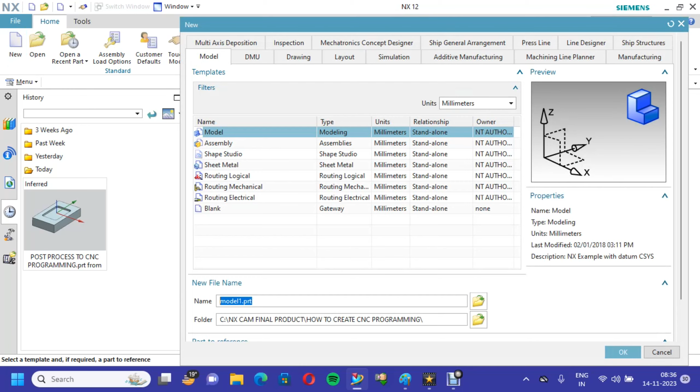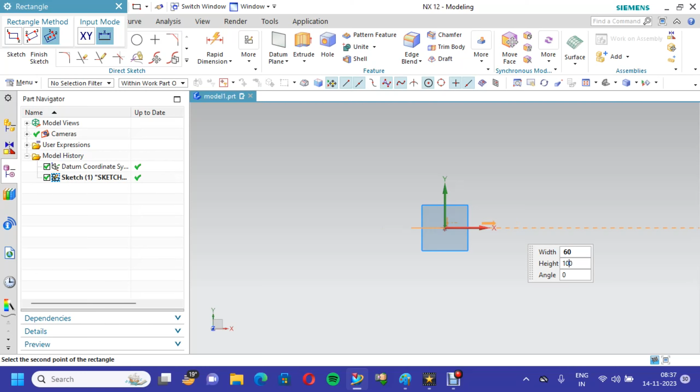Create one model or workpiece. My workpiece is having the width of 60 mm and 100 mm length. In this workpiece I am creating one rectangular pocket. The pocket width is 40 mm and the length is 60 mm.

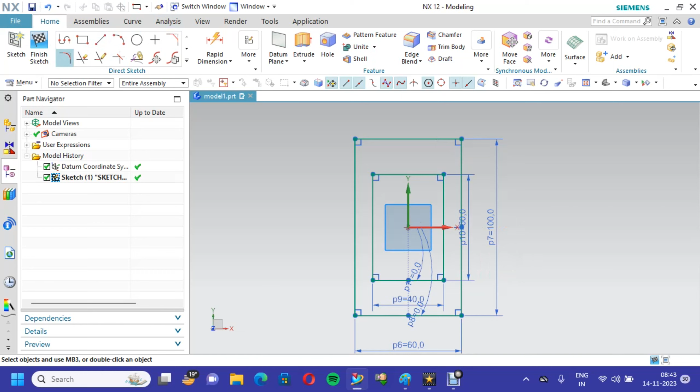I am going to make one fillet radius with the value of 5.

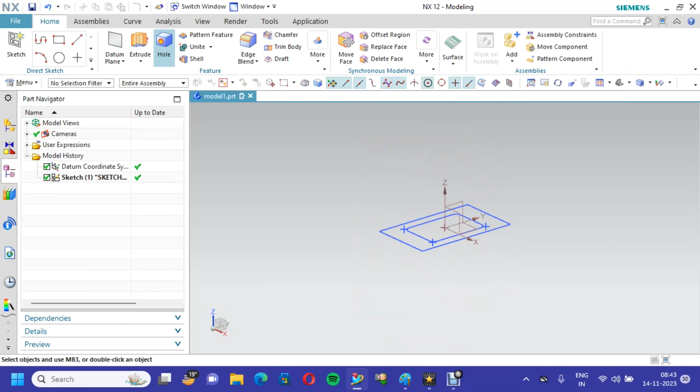Then I will extrude that workpiece. The height should be 20 mm.

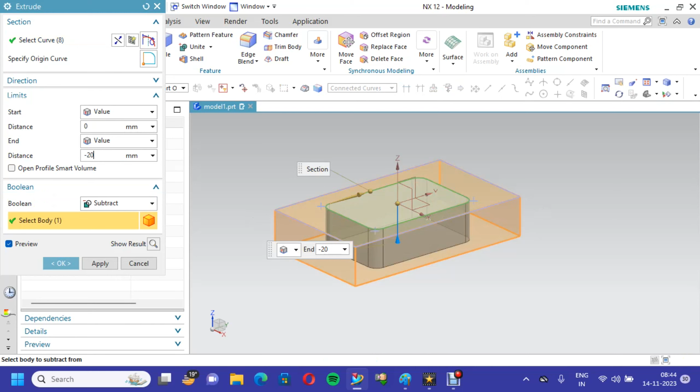Then I will cut the pocket of 5 mm depth, subtract minus 5 mm depth.

This is my workpiece. My workpiece is 100 mm length, 60 mm width, 20 mm thickness. In this workpiece I have created one pocket, with length of 60 mm and width of 40 mm, and thickness is 5 mm. Means the height of the pocket is 5 mm.

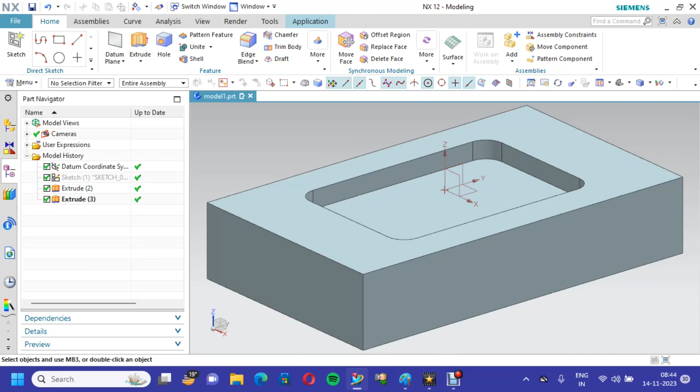So it's not necessary, so I will hide these sketch commands. We will go for manufacturing, go to application mode, take it manufacturing, CAM general, and go to mill contour.

We will go for geometry view. MCS mill appears, machine coordinate system mill. We have to edit it and specify MCS. You can specify here or here or here, but normally we will put it at center or left side. I am going to put this one.

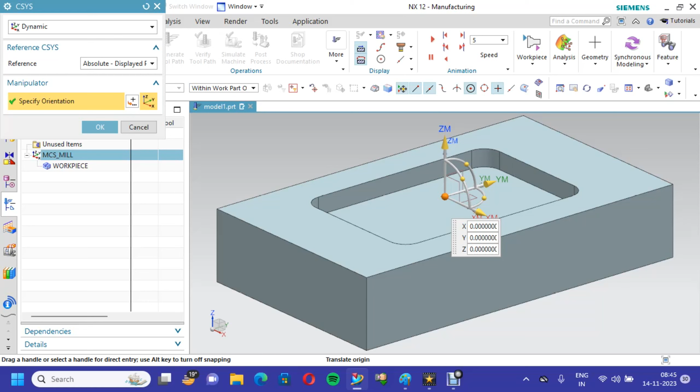Then clearance options. We should give safe clearance, meaning the cutter will come 10 mm above the workpiece. It is very important. We have to say 10, 15, 20 mm plus. It's very useful to create programs in post-processing for CNC milling.

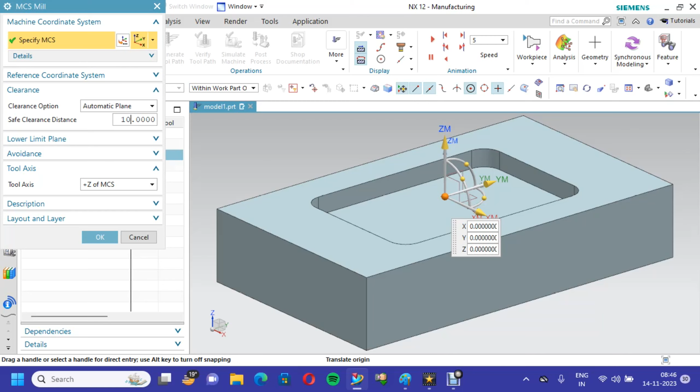If you are putting 0, it will come and touch the surface of the workpiece material. So we have to give safe clearance. I am explaining each and every step for creating CNC milling program only.

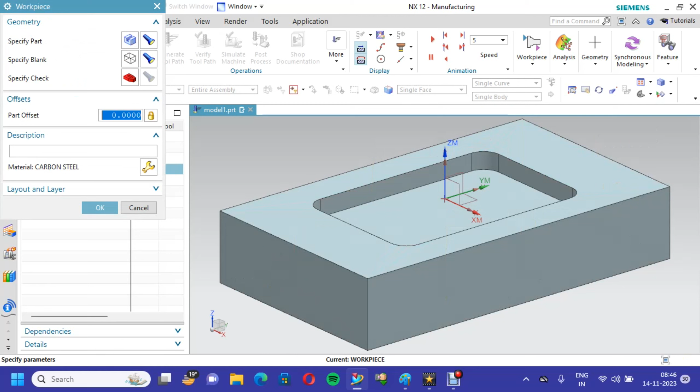Second one is workpiece. First we have to specify the part. This is my part. Then we have to specify the blank. We have to go for bounding block. I am not going for any extra material, so I am just putting this. We can verify this is my part and this is my blank.

Then we will create operations. We will take cavity mill. Here NC program we can make as program. Tool we have to select. Geometry we already selected by workpiece method, and for method also we have to go for finishing. So I will not give any allowances, directly I am going to finish. The main purpose of this video is how to create G code and M code for your control.

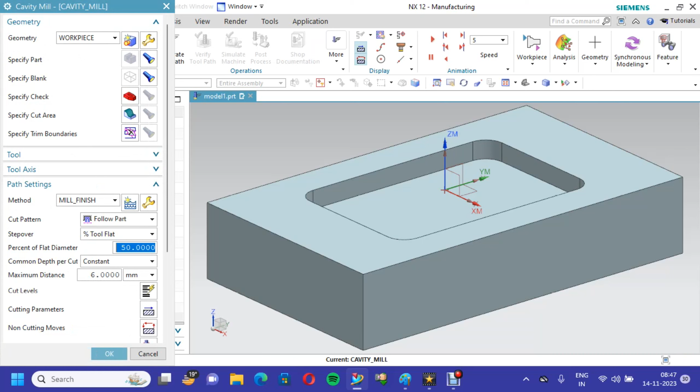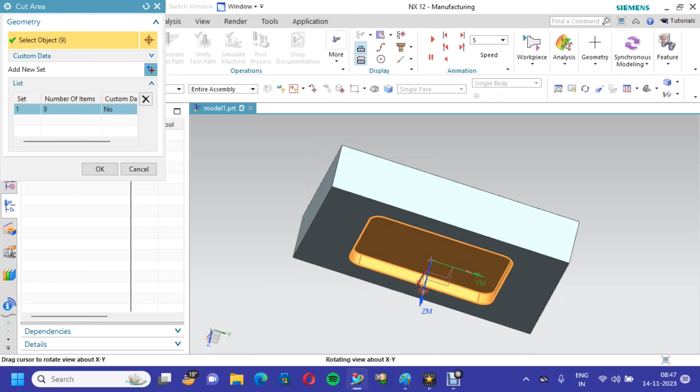We have to specify cut area. This pocket is to be cut. We have to check it. You have to click, and if it is not coming, you have to click again. Now all surfaces have been selected.

Second one, now we are going to take the tool. We have to create the tool. Take end mill. 10 mm end mill I am taking.

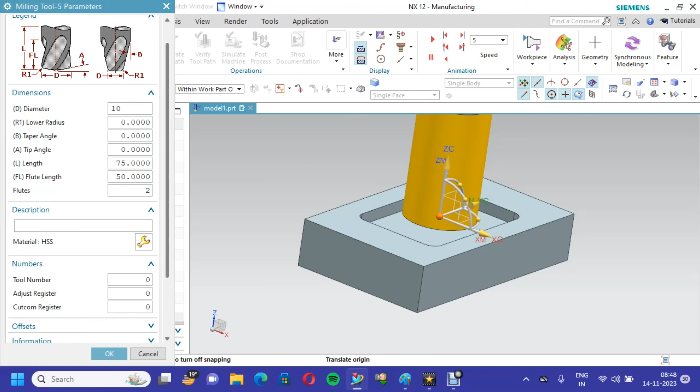The length of the end mill is 75 mm, which I am having with 50 mm flute length. You can make it material - you can say this is high speed steel, HSS end mill cutters, or you can select which cutter you want, which material you want: HSS, carbide uncoated, carbide coated. You can select as per your requirements. Now I am taking high speed steel dia 10 mm end mill.

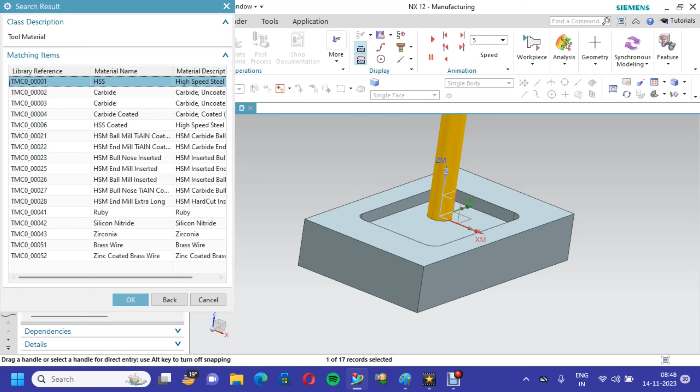Here we have to put tool number 1, because in the post processing, the tool number is automatically created by using this number only.

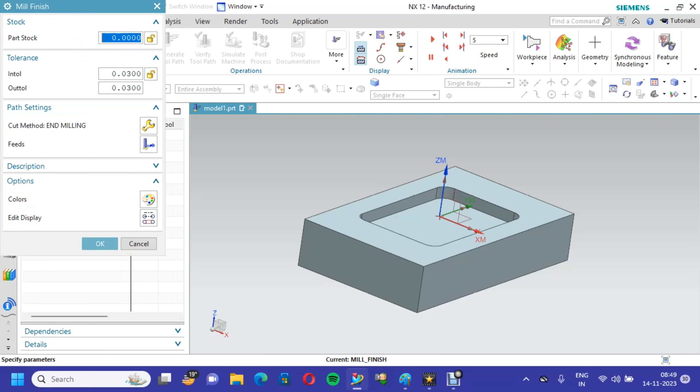Then tool axis, this is plus ZM axis, means the cutter will come from vertical direction of positive. Method: we are giving so many methods - finishing or rough finishing, rough or semi finishing. We will go for finishing, and we have to check we have given any extra material or part stock. We are giving no extra material or no allowance. Just default it is 0. We have to put 0.

Second, how to cut your methods. There are so many cut patterns available. We can go for follow part or follow periphery or profile or zigzag. For explaining purpose, I am taking follow part, and the tool flat is 50, means after completion of one cut, how much distance it will traverse crosswise. You can say normally 50 or 60.

That depth per cut constant - each and every time how much depth of cut you are going to give. I am going to give 1 mm.

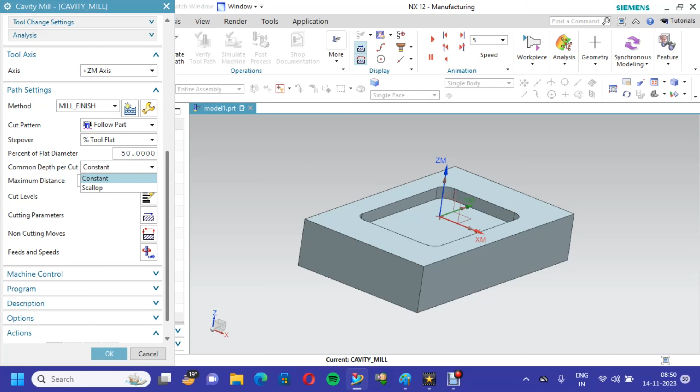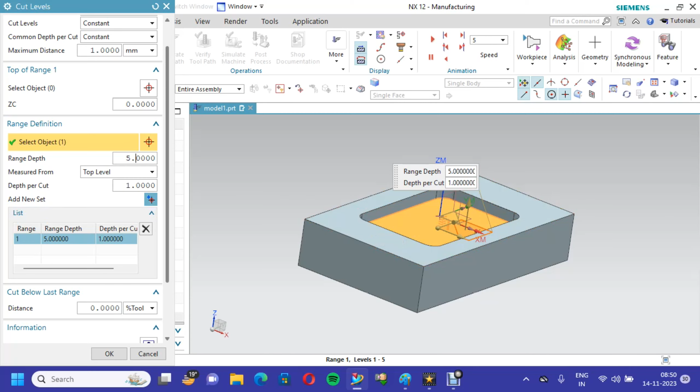Next one is cut levels. Here you can see all readings are available. Range depth automatic, cut level constant, maximum distance means depth of cut you have given 1 mm. The range depth means the depth of cut. The total depth of the pocket is 5 mm. It is measured from this top level. Depth of cut is 1 mm. You have cross checked.

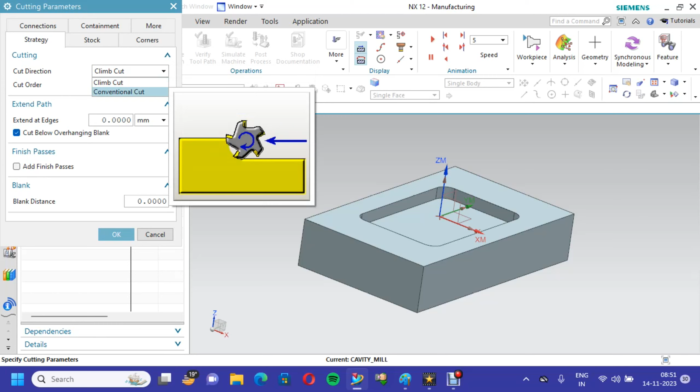Okay, then this is cutting parameters. Here you are having strategy or containment, more up. This is cut direction, whether it is climb cut or conventional. Up milling, down milling, you already know that you can go for climb or conventional. Cut order - how are you going to cut? Whether you will cut level first or depth first.

In this workpiece, I am giving only one pocket, so level and depth both are same. In this workpiece, if you are giving two pockets, you can go for level, meaning each and every time it will cut 1 mm material. If you are selecting depth, it will first complete one depth, then go for another depth. But in this workpiece, I am giving only one pocket, so you can take it depth or level, both are same.

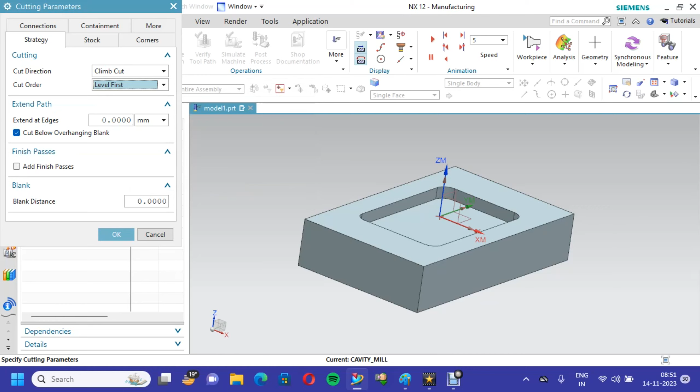The non-cutting moves - this is very important for creating post processor. It will increase or reduce your time in the machining process. Engage: how are we going to engage the tool? Helical means the cutter will touch the workpiece by using helical method. In this ramp on shape, it will come in a slope and touch the material.

It is in plunge, it is plunging directly into the material. So normally we will take helical or ramp. We will go for that.

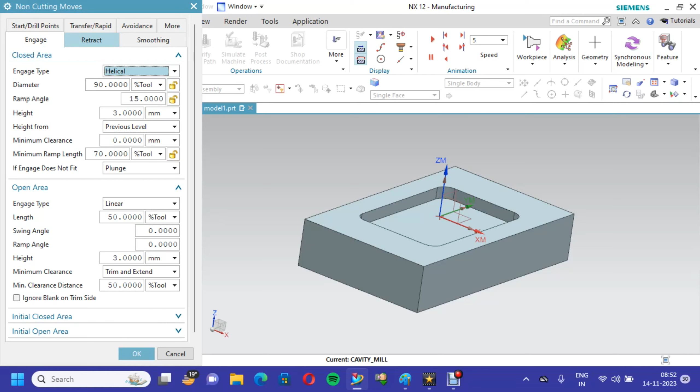Next, retract - how are we going to retract after completion of machining? How will you take back the tool? Means the same way I am engaging the tool, the same way I am retracting the tool. After completion of machining, the tool will come back 10 mm or 15 mm or safe clearance. Already you decide 10 mm by using helical or ramp method. It will come back.

The third one is feeds and speeds. It is very important. Surface speed: if you are using mild steel material and my cutter is high speed steel, the normal cutting speed will be 25 to 30 meter per minute. In this case, I am taking 30 meter per minute. We have to calculate feeds and speeds on this value. It automatically calculates and gives a reading of 0.13 feed per tooth, and the spindle speed is automatically calculated as 955 revolutions per minute. The cutter should rotate.

See, our workpiece material is mild steel, our cutter material is high speed steel. In this case, I have taken 30 meter per minute and feed per tooth is 0.13. The RPM of the cutter is 955. It will increase or decrease the machining time. We have to carefully calculate.

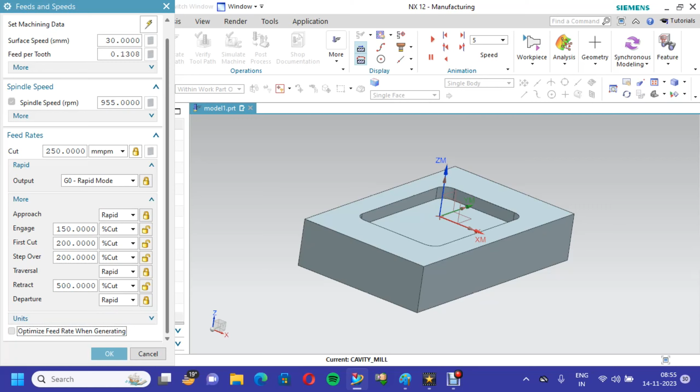Then we have to go for optimize feed rate. In this feed rate it will automatically calculate because of your surface speed and feed. It should come 15 nominal cut feed and nominal cut depth is 6 mm. You can increase or decrease as per your requirement.

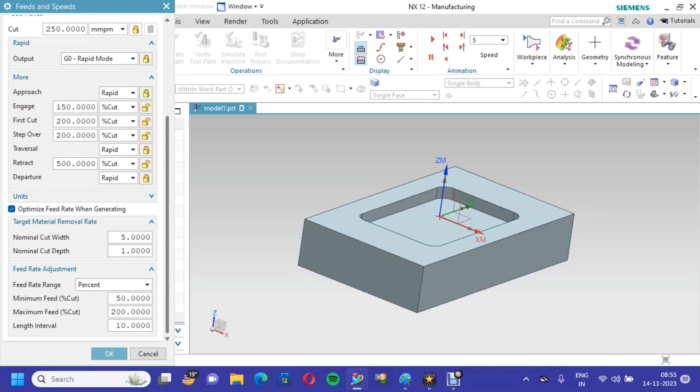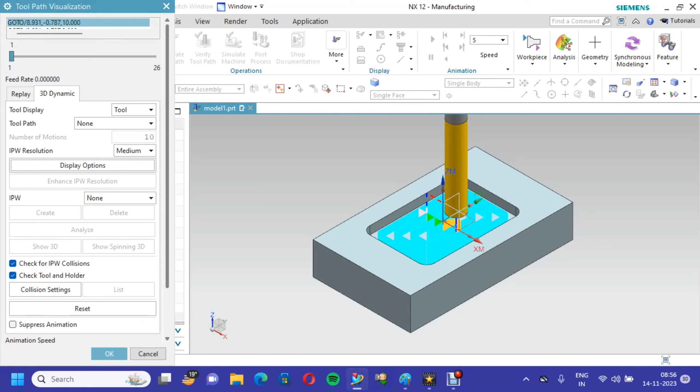Now the final step is to generate the programs. Now we have to verify the program by using the 3D Dynamic method and go for simulation.

See, each and every time it is taking 1 mm material. The cutter is coming and penetrating the workpiece at the center, and it will give circular motions. We have given a safe clearance of 10 mm, meaning first the cutter will come above the 10 mm.

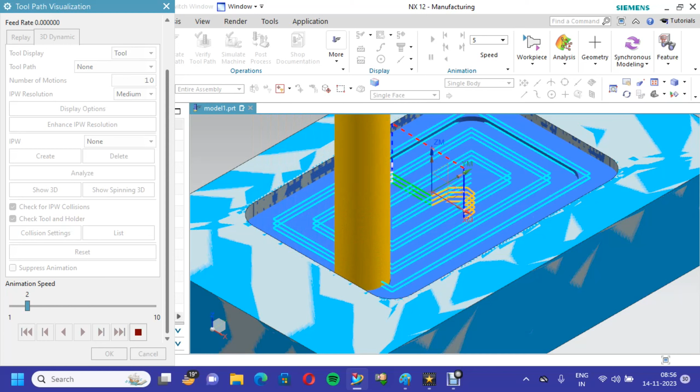It is very important. If you are putting 50, again the time will increase in the CNC program, because from 50 mm to 10 mm it has to travel, and it will consume another 10 to 15 seconds. So the machining time may be increased. We have to be careful about each and every reading.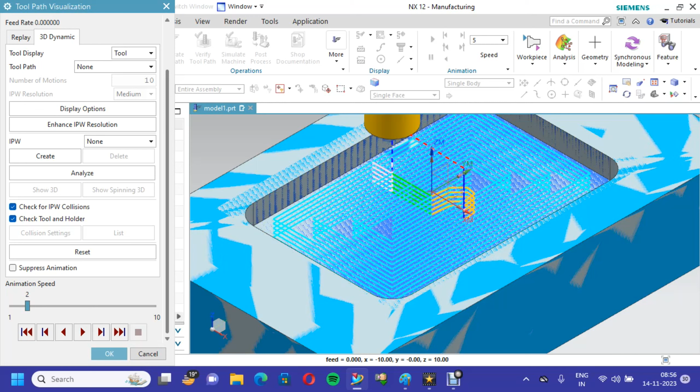We have to analyze it. 0.0 means there is no material left; all material has been machined.

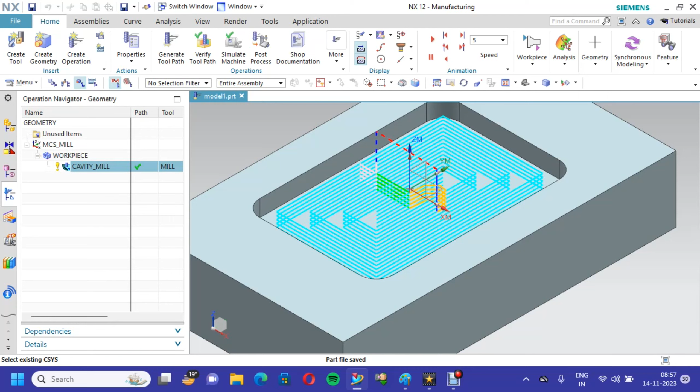Now we will come to the most important method, post processing. It is very important. In this post process library we are given numerous post processors available: Wire EDM 4 axis, mill 3 axis, mill 3 axis turbo, mill 4 axis, mill 5 axis, and lathe.

The library has a lot of post processors. We have to select or set the post processor for your machine or for your milling control. The control may be Fanuc, Sinumerik, Heidenhain. You have to select anyone according to your machine.

Here you can see Deckel Maho. See, Sinumerik 840D. IN means inch, it will give output in inch. 840D underscore mm means it will give reading in metric. So by default I am taking this mill axis, then go to OK.

This is where you want to put the output file. Another important thing is whether you are doing post processing in metric or inch. Normally we will go for metric. Then the post is already defined by the reviewing tool, so we have to say OK.

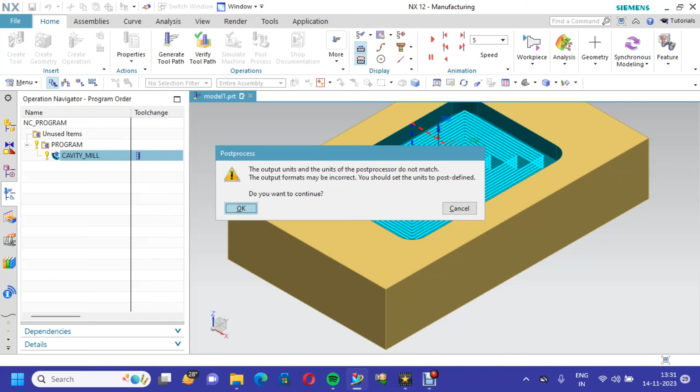Here the post processor converts the CNC milling into G code and M code programming. You might be knowing that G40 means cutter radius compensation nil or cancel. G17 is the XY plane, and Z will be the tool plane. G90 is the absolute coordinate system, G71 is metric.

If it is G70, it will go for the inch system. G91 is the incremental system, G28 is the machine reference, Z00, T01 means tool number 1.

M06 is automatic tool change. Here you are seeing S955, meaning the spindle will rotate 955 revolutions per minute, which is RPM. M03 means spindle in clockwise direction. Z10 G43 is tool height compensation, and Z10 means 10 mm above.

Here the height compensation you can make 20 or 30 or 50. I have defaulted it to 50, but now we can also edit it. Then the tool comes 3 mm above the workpiece. From here it will start.

Here M08 means coolant will be on. Now it is taking material. Finally you can see after completion of the cut, it goes back 10 mm. Now M05 is spindle stop.

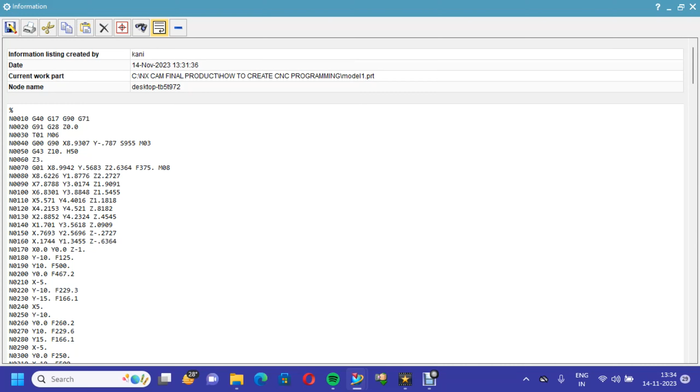You can say any number as you like, 3333. This shows how to create or edit the programs. We can close it and go for some other post processor.

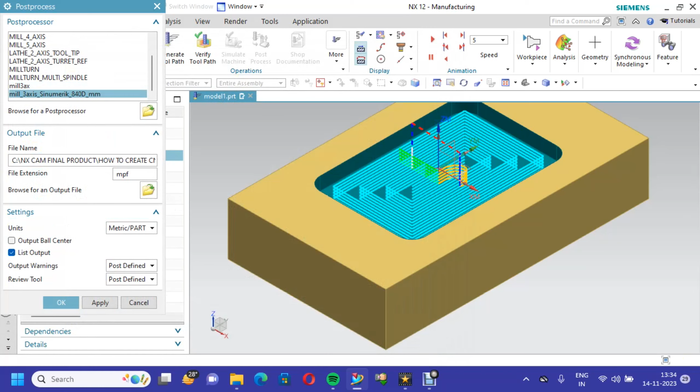Say mill 3 axis, or I will take the Sinumerik 840D in mm. Everything is the same; I have not changed anything. Now here it shows it is slightly different than Fanuc programming.

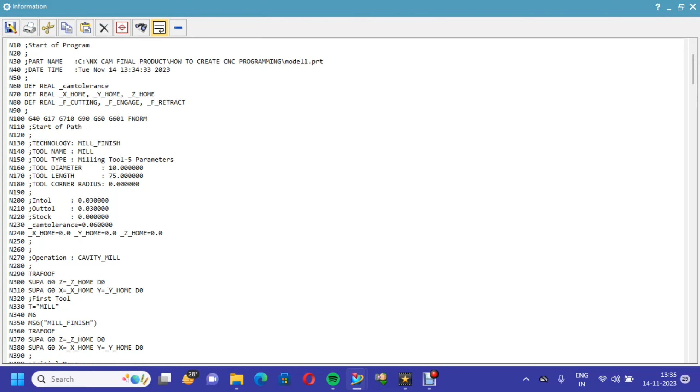It will show the startup program, part name is there, your CAM tolerance is there, reference X, Y, Z direction, G40, G17, G90, G60, G601, FNORM — so these are the many forms. It is in Sinumerik form.

It gives a lot of readings. You can change or edit. Now I am editing the program. Which one is not wanted?

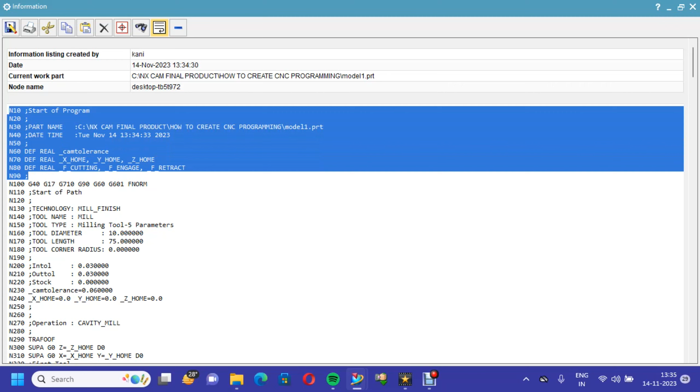The startup program is not required, part name not required, date not required, CAM tolerance here not required, up to this one not required, so you can delete it. Here G40 is important.

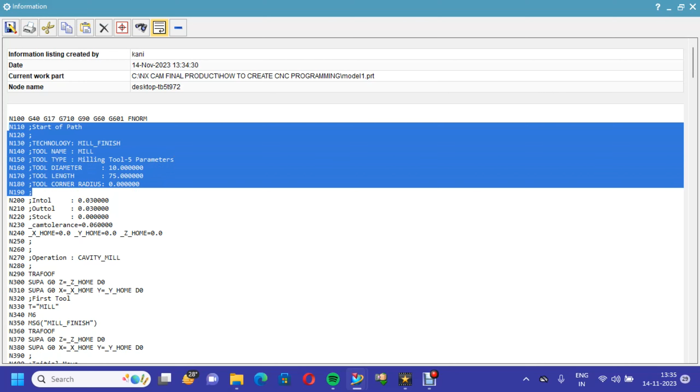Technology, mill finish, name, cutters, diameter, length, tool corner radius, in tolerance, out tolerance, stock, CAM tolerance, the home position — this is for reference purpose, again it is not required. Operation is cavity mill, you know that. First tool, mill.

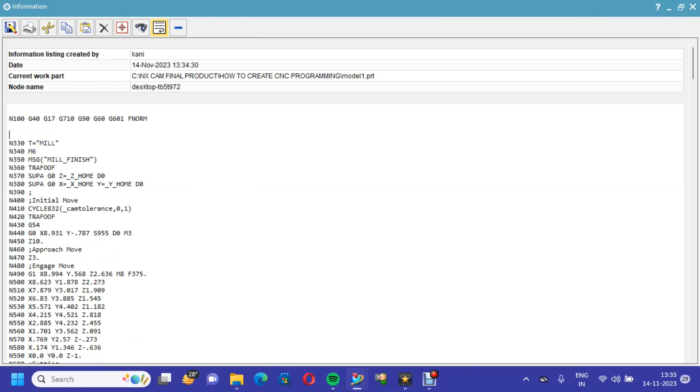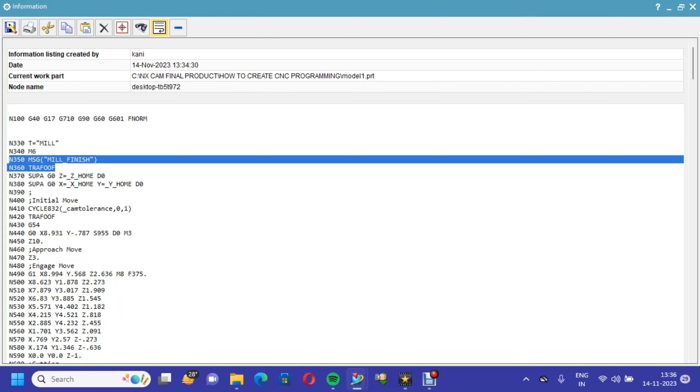This is not important. Here mill M06 is important, meaning automatic tool change holder. Mill finish may not be important. You can go for the initial move here; up to this, no need.

Here you can go for T1, or 1 is required — this is required. This approach is not required. That engage is telling theoretically what the Sinumerik control is doing.

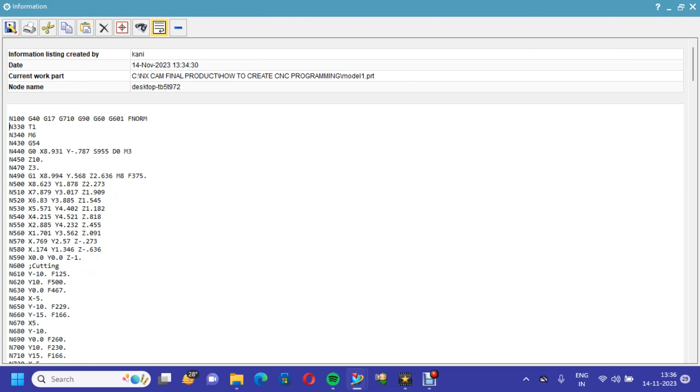In this way, you can edit your programs. You can go for this one.

Departure — there is no need. You can edit this one. And Z10 is important. The end of path from here to here is not important.

End of program is not important — this is given theoretically. Now it is M30. Now it is over, thank you for watching.